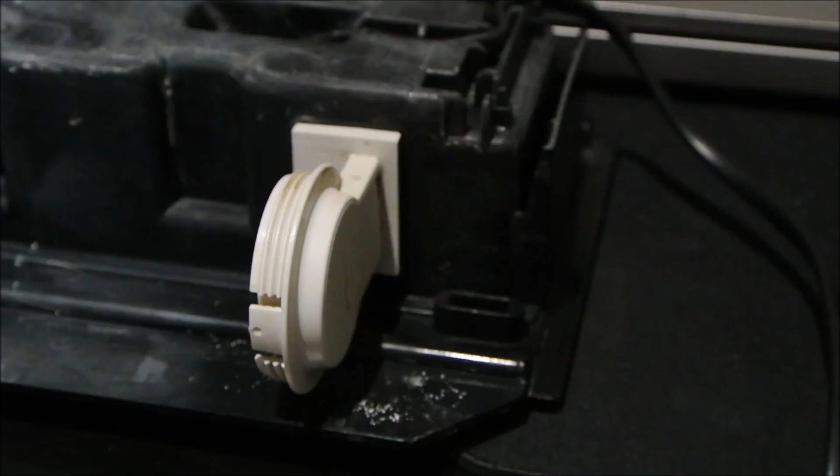So I've taken the unit off the Roma fish tank and I've placed it upside down. Along here you'll see there's three holes on each side, and then there's clip fasteners either side of that. What you're going to need to do is start on one end, get a screwdriver in there and push that out, prise it out, and you'll probably hear some cracking.

Now when I turn this around, you'll see I've taken this one off already. Underneath it there's essentially silicone sealant all the way around it, so that cracking is going to be that sealant coming off. It's not stuck on too tightly.

Once you've got one section off, you can get something flat underneath here, like a steel ruler or something, to basically prise it off very gently all the way along the length of the piece of plastic. Once you've got that off, you're ready to sort out the wiring inside.

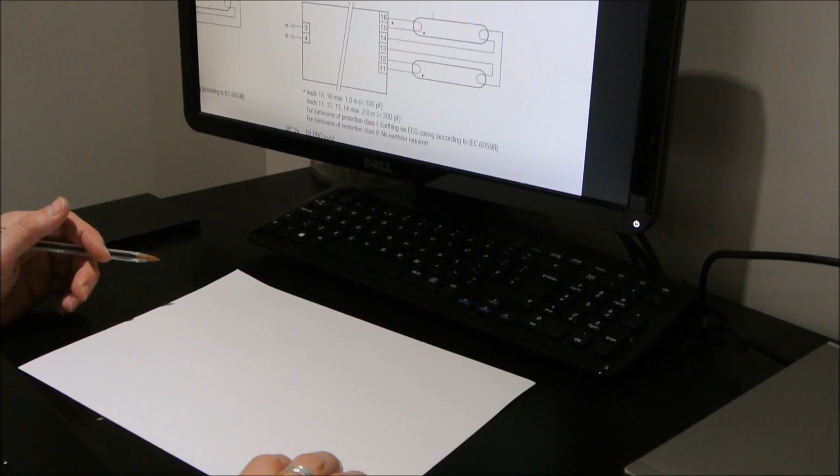This bit is where the most technical part of it comes from, and if you get this, then you'll be comfortable doing this at home. If you've got some electronics knowledge, this is pretty straightforward. If you haven't, it might look a bit foreign to you. So I'm just going to try and explain it as simply as I can, so you get the idea.

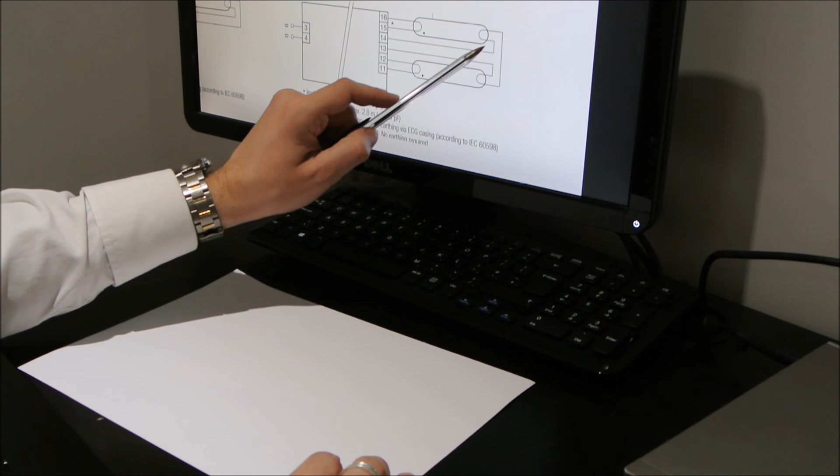Basically, this is the wiring diagram for the ballast that you're going to buy. It looks a bit complicated, but actually all these represent is the fluorescent tubes, which have 4 pins on each tube, and it tells you which numbers to wire them into on the ballast box.

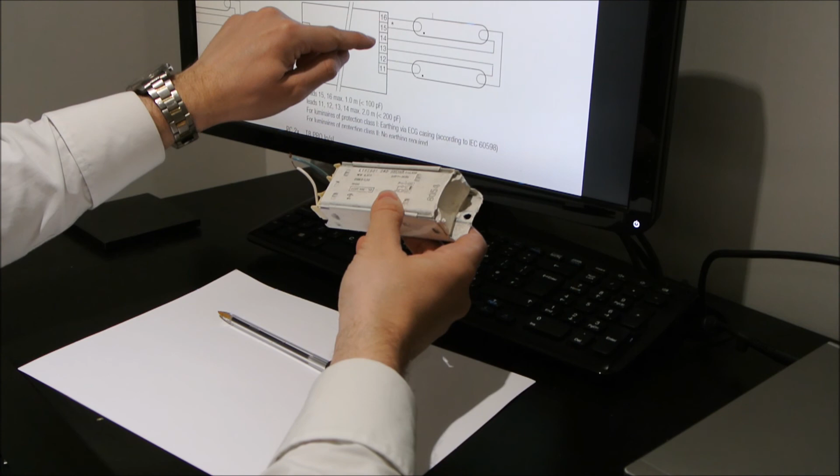Now when you actually look at the box itself on the side, this is the old one, but you're going to have 1 to 16 or a similar number. It doesn't quite matter as long as you get the idea it's in order. This might be 4, 5, 6, 7, 8, 9, and this might be 1 and 2. Doesn't matter. On here it's going to be labelled like that, and you're going to have a similar diagram on the actual box.

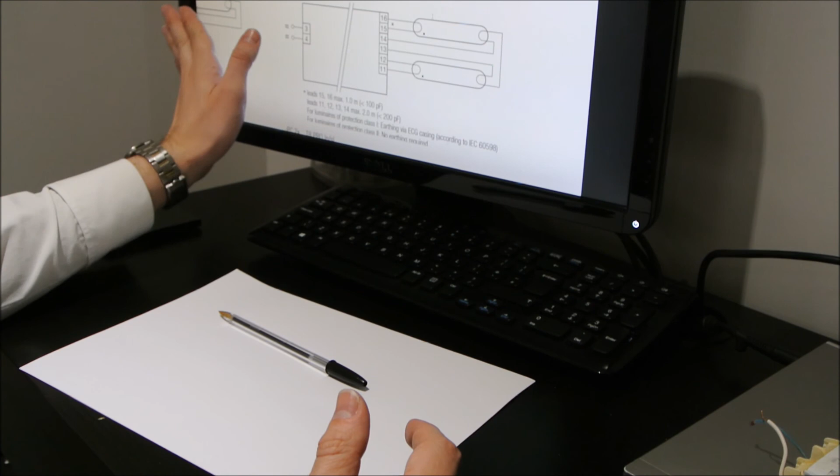So pins 3 and 4, or it might be 1 and 2, doesn't matter, essentially this side with these symbols on it mean that they go to the live input from your plug. Now it doesn't matter for this one which way around they go, it doesn't specify which one it is. If you get the same version that I've bought, it will be the same - you can plug them in either way and it will work it out and sort it out for you.

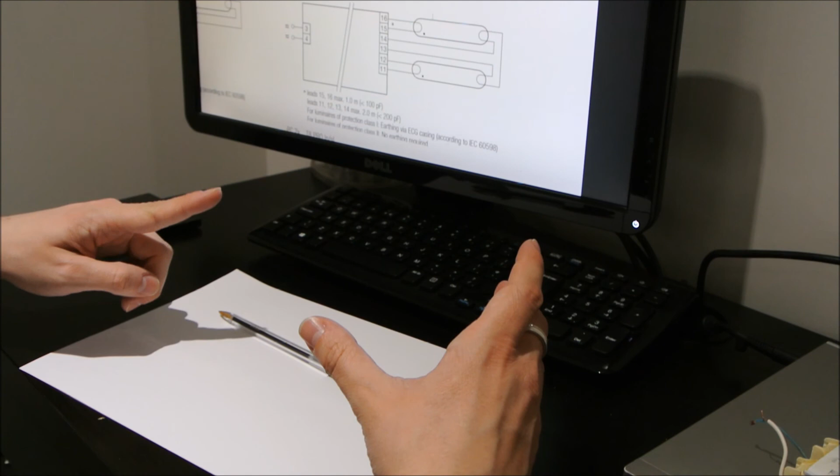So in the box you're going to see the power cable coming in, and then you're going to see a brown and a blue cable coming out of that. That's where they go.

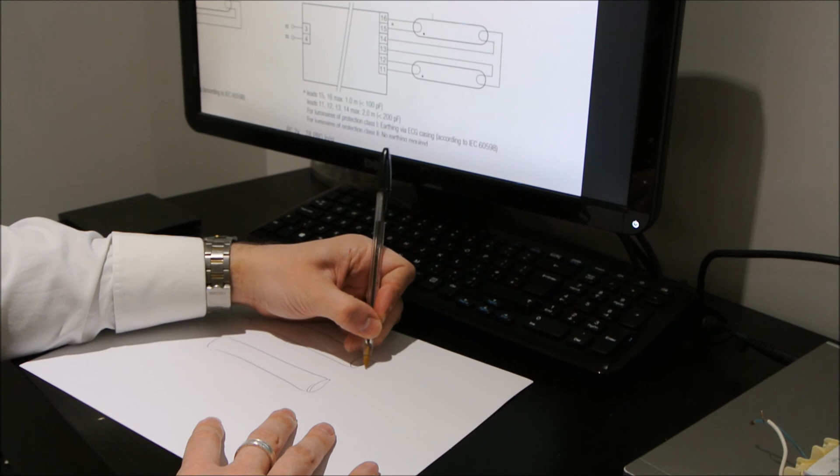When you get to this side, the easiest thing to think of is these as fluorescent tubes with pins on them. So essentially this is one tube and then this is another tube here, and they've each got their 4 pins. Now all this is saying is pin 16 needs to go to this side of the tube, yeah? So this one goes to 16, or whatever number you've got. This one goes to pin 15. Quite straightforward.

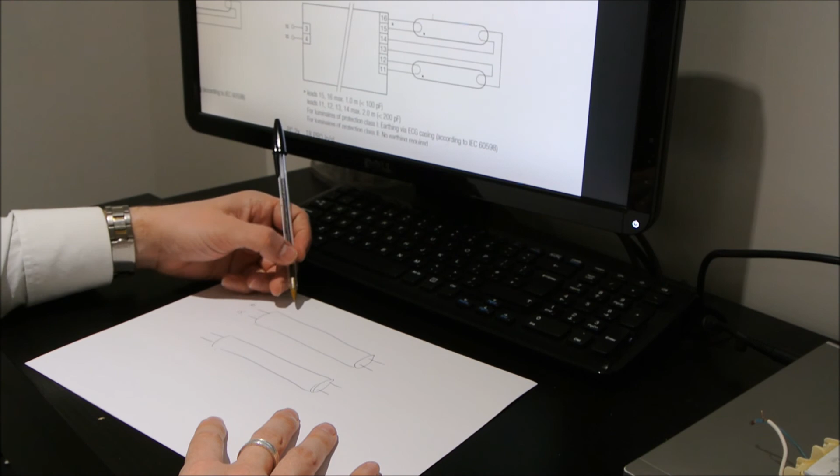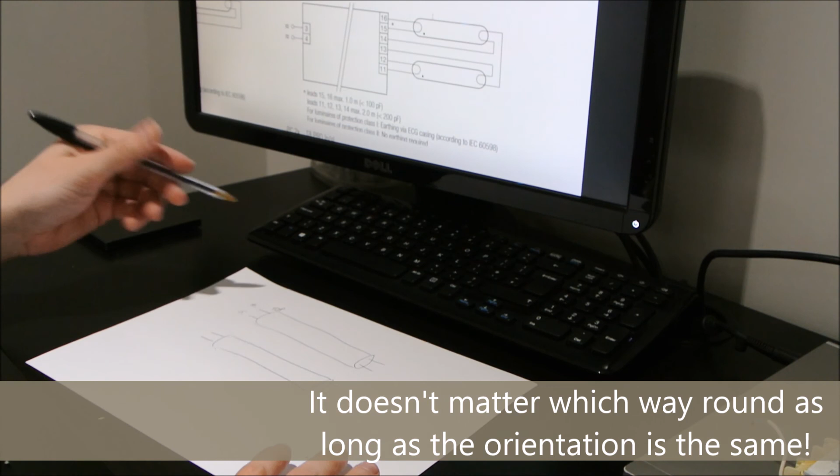All you need to do is essentially remember that this is the top of how it comes through the box that contains all the power stuff, basically. So when you look at the box, you're going to have the holders, and the tubes clip into the holders, and then inside the box there's cables that come through, some on the top and some on the bottom of the box. This side, you just have to make sure that you stay for the top of that and the top of that.

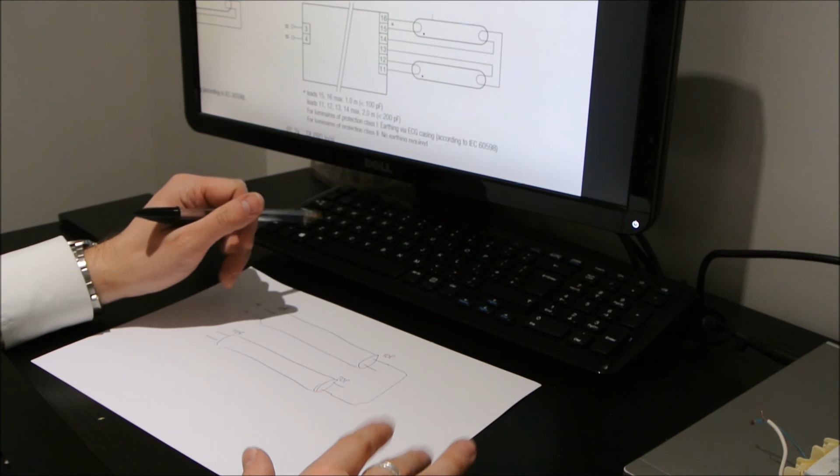If you do that, you can't go wrong, essentially. So on this side, it's saying that the cable coming out of the top of this bulb needs to go into this bulb here, which we can connect with a cable, no problem. The bottom side of the right tube needs to go into pin 14, and the top one needs to go into pin 13, or whatever numbers you've got. On this side, the top of this tube goes into 12 and this one into 11.

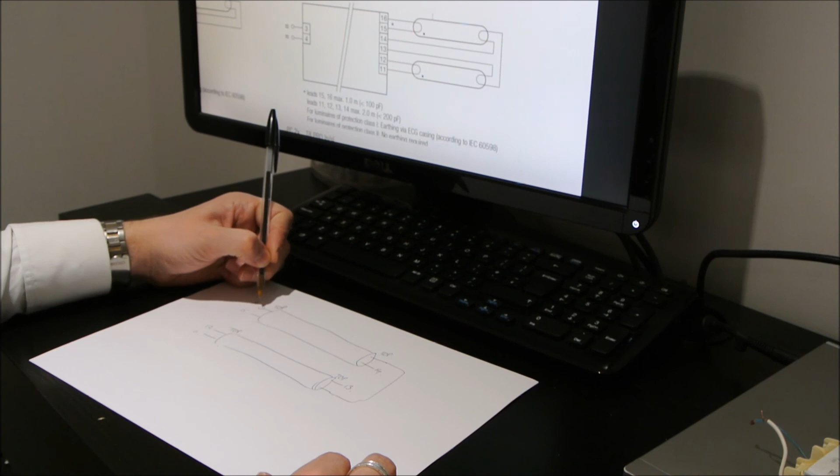All you're going to do now is get your wires and link them from this part into that area on the ballast box. That's all you've got to do. Once you've done that, you can test it out and see if it works.

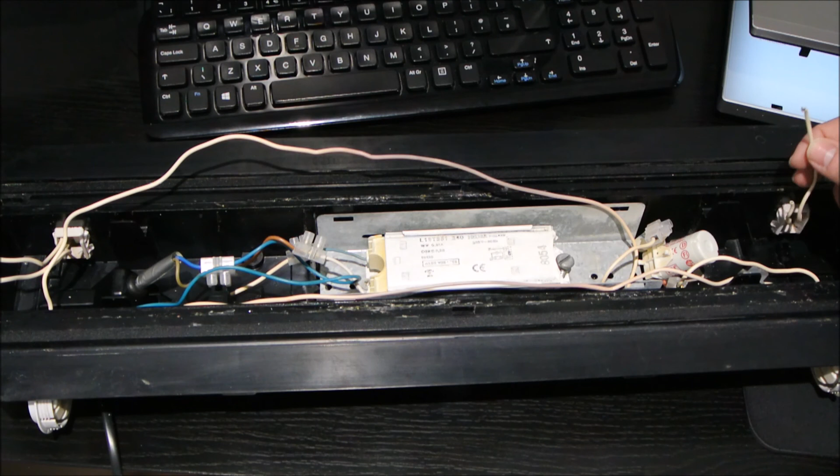I'm going to show you this again on the box itself, so hopefully you get the idea even more so. When I first got my light and realised I couldn't run the other light fittings, I looked, and as you can see, somebody's cut this and taken the starter out. So you'll have two starters if you've got a normal unit, and these will be plumbed in essentially.

What you need to do is remove this and keep as many of the cables as possible, because you're going to want to reuse those to connect it up to the new ballast.

I took out the old ballast, which you can see here. I just unscrewed that and took all of the cables out. I left as much of the cabling in as possible because I wanted to reuse all of that.

You can find all this stuff on the internet, but essentially each of the circle areas here, this represents a fluorescent tube and that represents the other fluorescent tube.

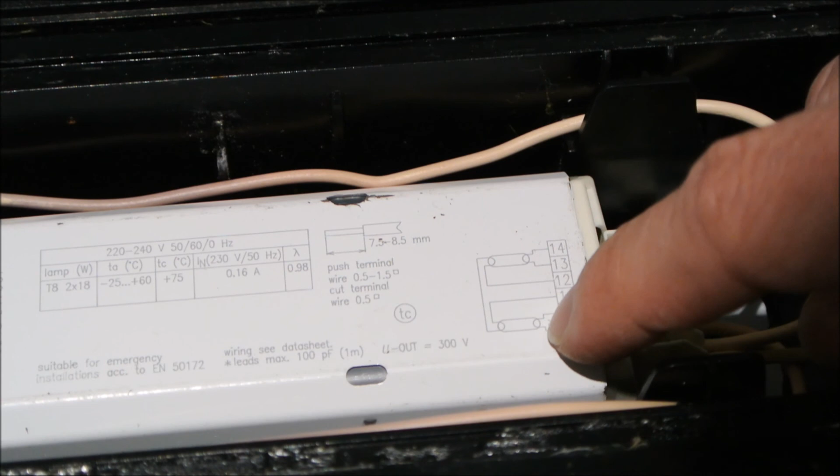The easiest thing to do is I chose the bottom of each bulb to be the bottom connectors on the fluorescent tubings. So where the cable's coming out, the bottom of this one, the bottom of here, this side, I chose to be connected to pin 11. So essentially that gets pushed into pin 11.

The top of it is saying that the top of the bulb needs to be pinned into pin 12. So I put the top cable into pin 12, which is that one there.

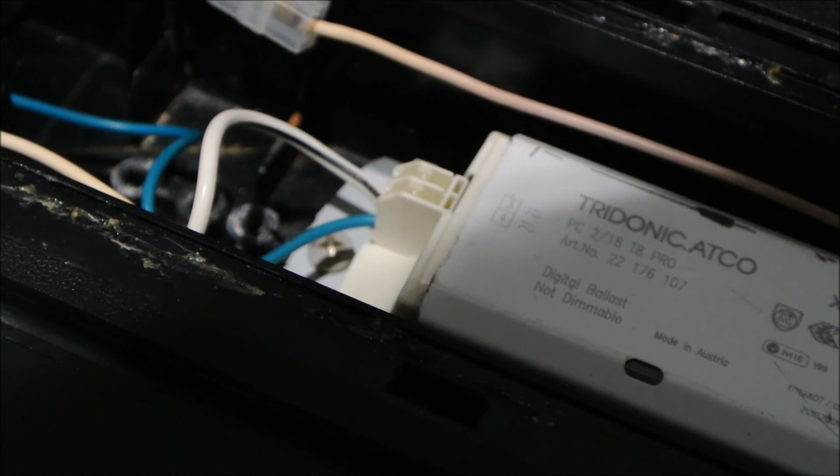Looking at pin 11, that needs to go to the top side of the other side of the tube. So you can see here I've got this long cable, number 11, running all the way over to this side and plumbed into the top side of this fitting here. Zoom in there for you.

So this one here goes into the top of this bulb. The bottom of this bulb is saying that it needs to go into the top of the opposite side. So this piece here, you can see, links from the bottom to the top.

Coming back around, the bottom of this one on the wiring diagram, let me get that in focus again. So the bottom of the left hand lamp over that side needs to go into pin 12. So there it is, you can see another long cable going in straight into pin 12.

On this side then you've got the top one which needs to go into pin 14, and then the bottom one which goes into pin 13. And that is your lot. On this side, it doesn't matter which way around you wire these in. Basically, one's positive and negative from your live feed from the power socket, but this will work either way.

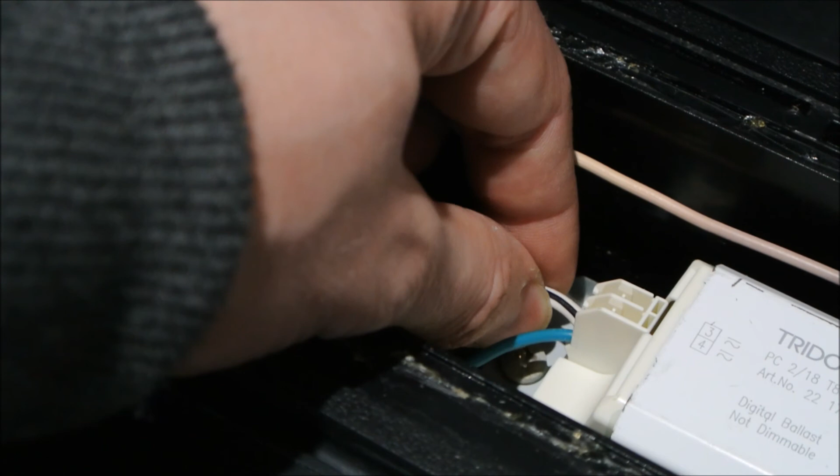I had to get an extra piece of cable in there to reach, but you might be able to reuse some of the cable that you've already got in there. If not, just get a little bit of cable. I actually used speaker cable, quite a reasonable thickness, because I wasn't sure how much power was going to go down it. You don't want a really thin one because it could burn out.

And I've used these blocks, these were already in there. It's sealed at the bottom, so what I would say is don't get the top of this wet. If it does get wet, then turn your lights off and make sure that it's all dried out, because you don't want water getting here. This will affect these connectors.

You might, if you've got a glue gun, potentially solder them together and then use a glue gun to seal them up, so no water can get in, and then you've got watertight connectors. However, that doesn't make any difference to the ballast box, because obviously here you've got open connectors anyway.

What I'm going to do now is I've bought some silicone sealant, just some silicone glue. It's aquarium safe, and I'll whiz this round the top of this, and that'll basically watertight that up a bit better, and put the top back on, and it's ready to go.

The end result you should see is, turn that on, and there you go, you've got both lamps working.

I've got an Aqua-Glo lamp, and then I've bought a standard 6500K lamp, which is that one off the internet. This was £5. That was £8.50. This is one for growing, and that one's just to make the tank look bright. Anyway, that's that done.